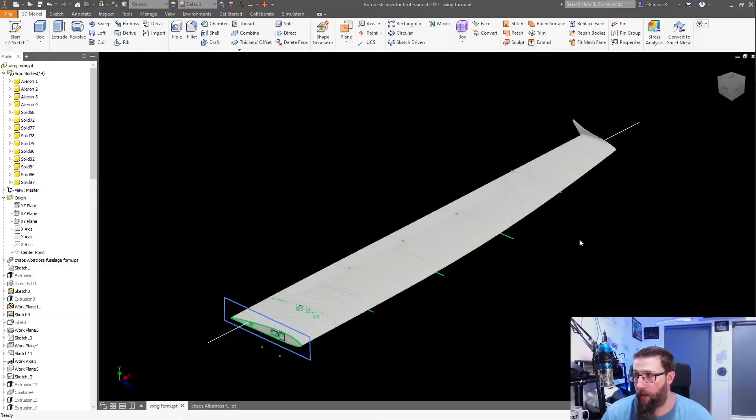And I got so far, so fast, and seriously, the ailerons were done in the first 3 hours. Ailerons done, 3 hours, no problem. Started working on the wing. Oh my god, so bad. All right, let's jump in Inventor and have a look. All right, let's go over this real quick. Not really much to go over.

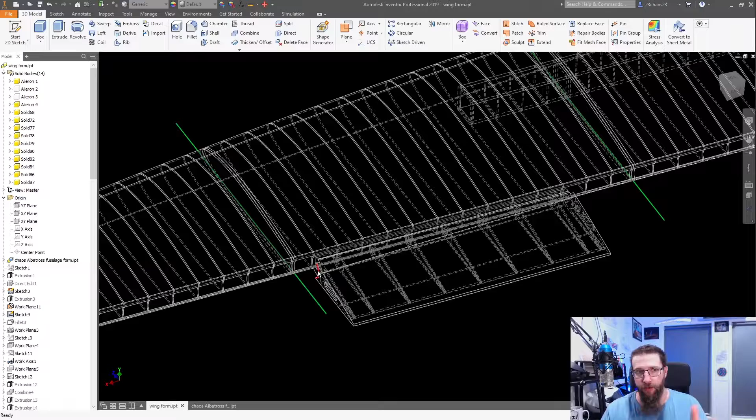So ailerons are done. They are broken up into 4 pieces. On the one side, there is a slot. On the other side, there is a little tenon. There will be a 3mm carbon fiber rod that will go through all of them, and this will be the hinge. In between each segment, there's going to be a slot tab, the hinge thing that comes out of the main wing that the hinge goes through, so there'll be bracings along the whole length of it. Hole goes through the whole lot.

There's internal bracings in here. I might increase those just a little bit. They're the same as what I've done for the ruddervator and the diagonal stabilizer that's printing at the moment. That's still going. That's got another 3.5 hours to go. Yeah, so that should be good.

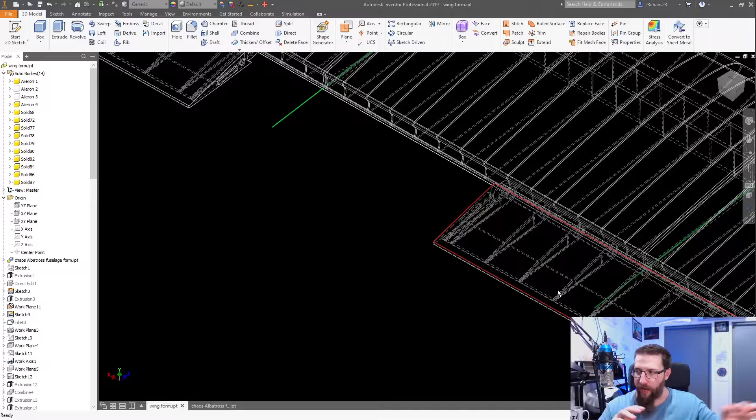And then because the wing has a weird lofted shape, you can't just stack them in any order. You have to stack them in a particular order. I've created little identifiers on them. So this one is the first one. Obviously, it's got a control horn on it. It's pretty hard to miss. That one has to go here because this is where the servo mount goes. That's where the servo hole is supposed to be, somewhere over there.

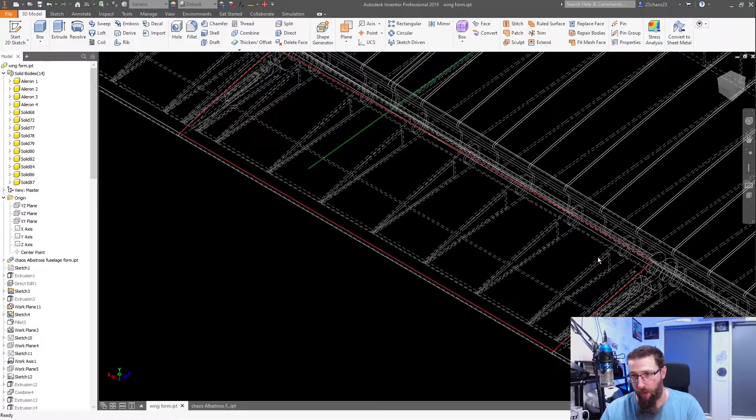And then next up, we have a circular cutout here next to this tenon join. So I've got a circle cutout in this one, in this one a triangle cutout, and in this one a square cutout, and obviously this is the last one, so nice and easy. So we got circle, triangle, square. Increase in geometric shapes. Instead of putting 1, 2, 3 or A, B, C, I thought having the shapes would work better. And it also adds a drain hole for the resin printing to operate better.

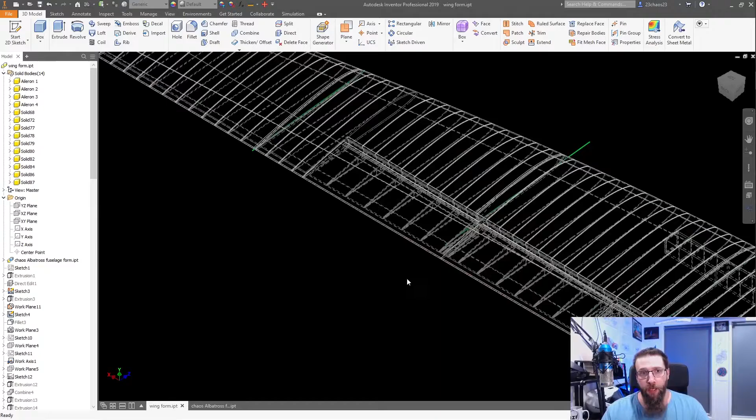So yeah, that's the ailerons done, and as you can see, I'm slowly but surely going through the process of cutting in the ribs and adding the ribs, the cutouts for all the spars, joiners. I've got the layout of all the different spars, all the carbon fiber tubes and stuff that I want to use. I've got that layout already sort of worked out.

These red lines are where some extra carbon fiber rods are going to go in, and where the purple lines are, that's where each segment of the wing is going to be split. So I'm going to print them in 150mm sections. I've found that 150mm is about the sweet spot for printing, because anything over 150mm you're looking at over 27 hours printing. So around 150, that's like 24, 25 hours, I think, if I remember. It depends on the settings, but yeah, that's sort of my sweet spot, 150mm tall.

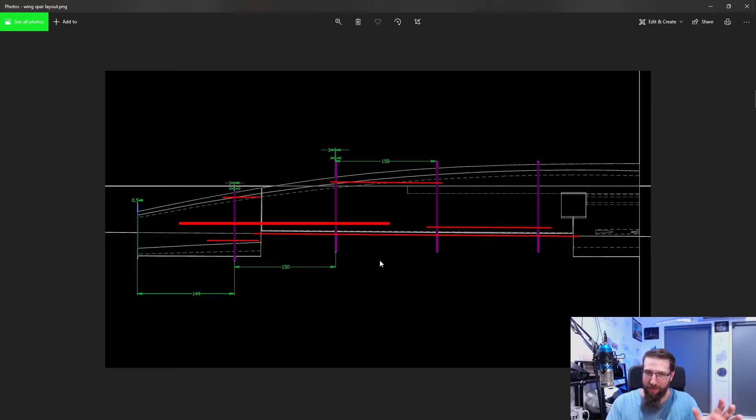I could probably get away with printing stuff lying flat, but then I deal with other issues that I don't really want to get into. So yeah, just 150mm is fine, and this is where the layout of all the spars is going. You can see here, this is the 500mm long carbon fiber rod for the hinge, and then I've got some extra rods laid out. I've got them all on the floor with a tape measure laid out, so I can figure out where I want to put what, going through which section, which section is going to be joined to what and all that. And I did all that before I started cutting all the ribs.

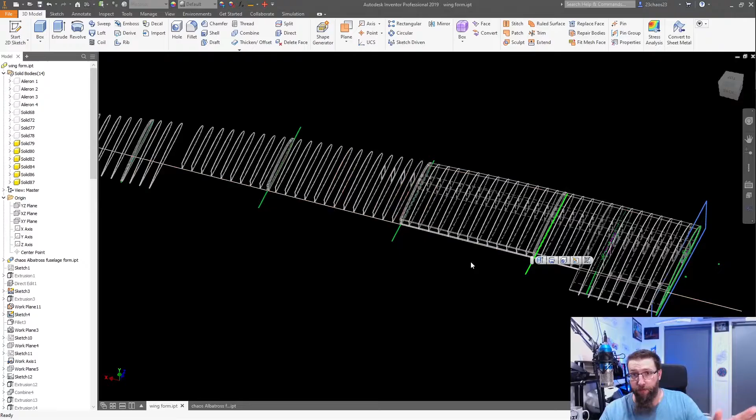But now that I'm getting into cutting all the ribs... I mean, just look at this. Cutting the ribs for all of these segments, and then there's all of these other pieces that I'm going to use to hollow out the ribs to make it even lighter. That all worked fine, all the way up to here. And then here where you see this line, I was going to split this section and that section, exactly what I've done for the other ones. But for some reason, something going on here with that servo area that I mentioned, it doesn't want to split on this line.

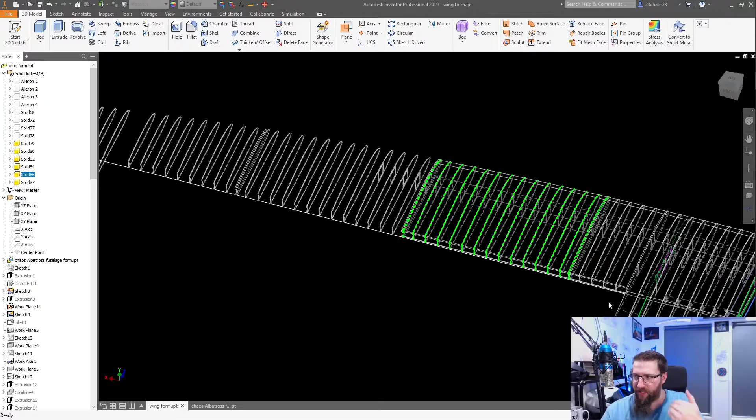Now I've split the ribs, right? So I've got the solid for the ribs. I've split this, there's one on this side and those on that side. That split fine, which I don't understand because those ribs are pulled off of geometry from the same root geometry. The only thing that was different is that those ribs didn't include the cutout for the servo area. See how it just goes straight? There's no cutout here. So that's what led me to believe that maybe there's an issue with that servo cutout and that's what's causing it.

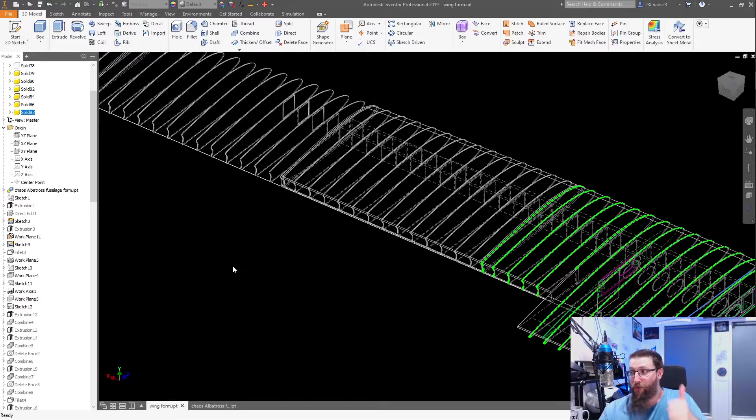So now I have to go all the way back in here. Before I started recording this, I hit delete on all the features to create that servo mount and just left it alone to figure it out because it took some time to calculate. I thought it was going to crash or spit out an error and say it can't do it, but it looks like it did it, so phew, it didn't destroy anything else. Thank God. Okay, well I've got more work to do then. So there you have it, I've got more work to do.

I've got to now edit this and upload this so that it can schedule for tomorrow. What time is it? It's not midnight yet. So yes, I'm scheduling this one for tomorrow so that I can be a day ahead. I was starting to get later and later with the episodes, so this one will be out on time tomorrow, and it won't be just me doing it whenever I wake up and I've got stuff done.

So yeah, we'll leave it there for this episode. Just giving you an update of what I've been up to. Like I said, I'm working my butt off today for 14 hours plus, and I'm going to put in another couple of hours. I've got to stay up until that print finishes outside, so at least another 3 hours work on this. This is normal for me. Sometimes I just cram work for 2 days straight. It happens.